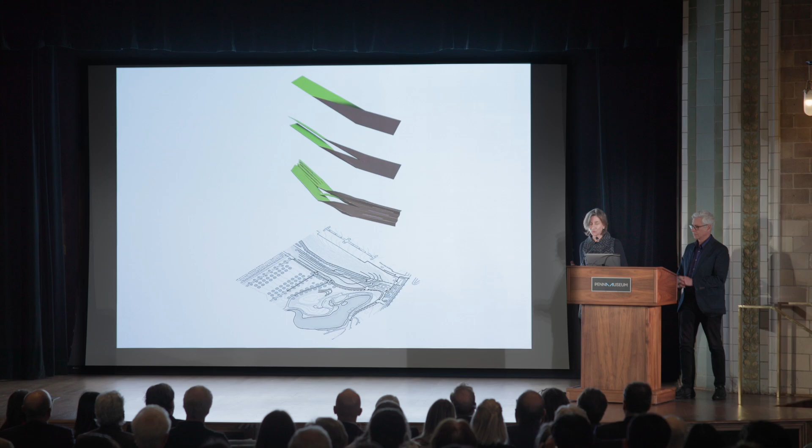So we started to think about what would happen if we could be 100% architectural and urban on one edge, and 100% landscape on the other side. What could you do over 400 linear feet to create a building that was neither purely architectural nor purely landscape, but somewhere in between?

You can literally see this kind of connection with the copper roofs, the historic buildings from 100 years ago, and then moving into the landscape—maybe in this case, a 10,000 square foot roof that adds a new dimension of green to the garden.

The idea of something that is a chameleon, structured architecturally, wandering into a new form, was one where we felt that idea of beckoning in and arriving at the edge of the city would make it almost urban in its context. Sectionally, because it would be embedded into a 25-foot high hillside separating the museum from the garden, we could have something that was a gradient—completely architectural on one end of this trajectory, and completely landscape on the other.

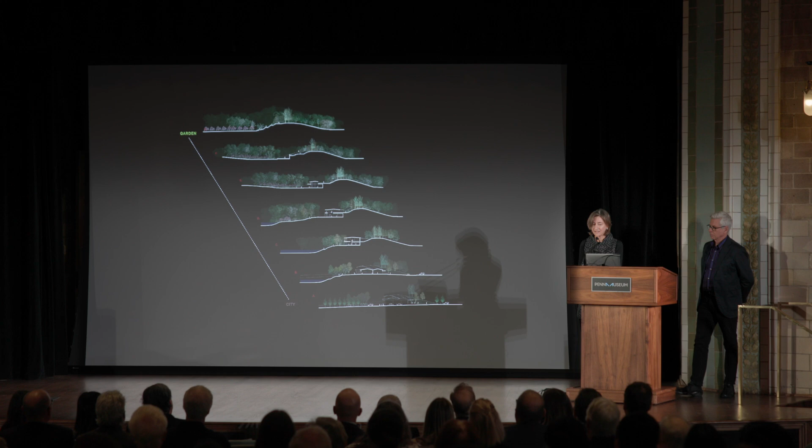And yet that liminal space, in this case neither a full landscape trellis nor really a piece of architecture, is a place where you can slalom through the building with the visitor center on one side. As you start to see this, it's literally a choice between the garden and the passage to the city that you can make.

Now, these curves, in many ways, while they seem natural and organic, did follow the path of the garden—had more work to do. The geometry of that edge of the roof and the ground plane are carefully following the drip line of a very rare flowering green cherry tree.

And it's one where, whether you're inside or outside, there's always that sense, if you're at the visitor center, that the garden is beckoning you outside.

Finally, as we reach the end of this 400-foot linear building, it's a two-sided room that can seat 260. But embedded in the hillside, if you look at the clerestory above, you can start to see that sense of all the levels of the garden coming into focus at this location.

So that room registers itself as an overtly architectural element, a kind of lantern, depending on the time of day. But this issue of environmental responsibility that we all share can be seen here. This is a hardworking building—in a way, it's a machine as well as, we hope, a place of beauty, a place of transition.

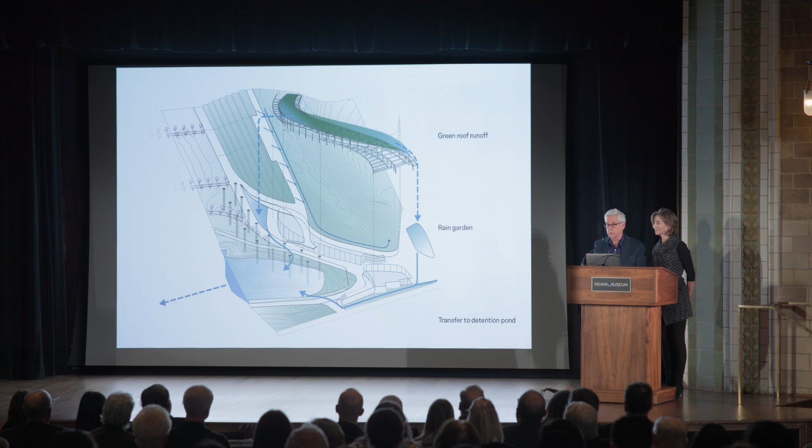But Marion talked about the kind of geometries of the building, and they do follow the beauty of the existing trees planted by the Olmsted brothers, but also take in the extraordinary topography of the building. Here you see, as it reaches into the garden, the building becomes quiet—it almost disappears. At times at night, it's a very subtle glow.

We were fortunate, about 10 years after the building opened, to, in effect, extend the footprint of the building, the agency of the building, into a kind of hillside. This was an opportunity that was important to the garden—a site where the hill was starting to erode, but also a very important way in which they might make this part of the garden fully accessible.

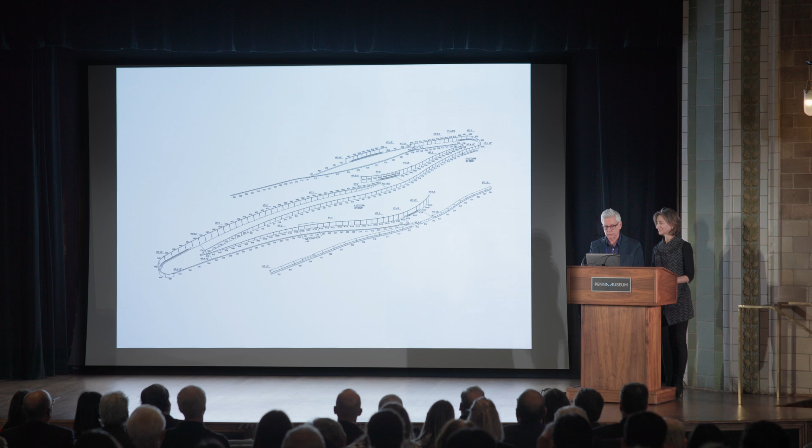But we hope that no one thinks of this as purely a handicapped ramp. It's an opportunity to create another garden, to create another set of views, another way of seeing the garden, extending that reciprocity between building and landscape.

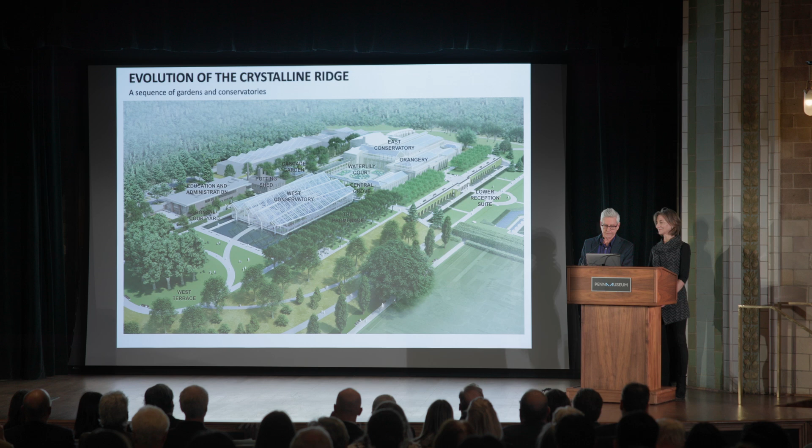We'll focus on only a few of those that are particularly interesting, that speak to the ethos of this project, which is really depicted in this kind of sketch that Marion and I do. We often draw together as a way of communicating. So the formality of Pierre du Pont's original conservatory, in our mind, could start to relax as it moved across the ridgeline with new construction, new buildings, new gardens.

That sense of relaxation could also be seen sectionally. So the conservatory could have a slightly looser, asymmetrical organization—an organization that, for us, its structural ambitions are in many ways a nod, a quotation to the kind of beautiful allée we see here, beautiful allées actually at Longwood, the way in which the inherent beautiful structural logic of nature could teach us. So this is the view of the conservatory.

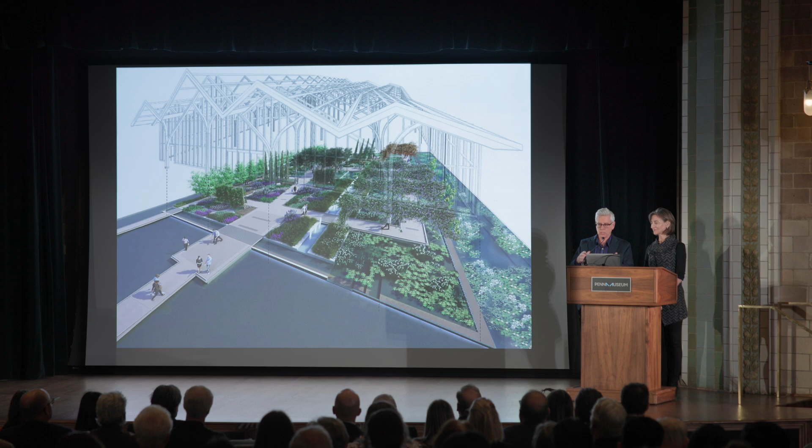It's a little bit about the size of a football field, so it's an extraordinarily large building. How could we start to domesticate it, give it a sense of both tactility but also scale? Working with Reed Hildebrand, extraordinarily talented landscape architects, we thought that the canopy of the conservatory, its placement of columns, could start to enter into a conversation with a series of gardens.

And those gardens, in some cases, travel across water. There's a didactic story, a story about a Mediterranean climate, which is becoming increasingly relevant to our warming climate. It's an opportunity also for playfulness. Longwood's known for its extraordinary floral displays, so the structure becomes an armature for those displays.

As we know from working with Longwood for over a decade, it's grown incrementally over time, and some elements have been ready for rejuvenation. The idea of their conservatory, which is nearly 100 years old, having a companion new conservatory was, in a sense, a humbling bar to rise up to—to think about the fact that Pierre du Pont's level of innovation is one that needs to be brought forward into contemporary terms.

Glass buildings are not noted for their sustainability. So if you think about where the innovation really needs to reside, it's not just in the aerial size that you can see, but it's in the subsurface. Of course, it's geothermal, and there's 1,000 linear feet coming through 10 earth ducts that are bringing the natural temperature of the earth, which is in the mid-50s, enabling it to be very efficient in either raising the temperature a bit or lowering it a bit.

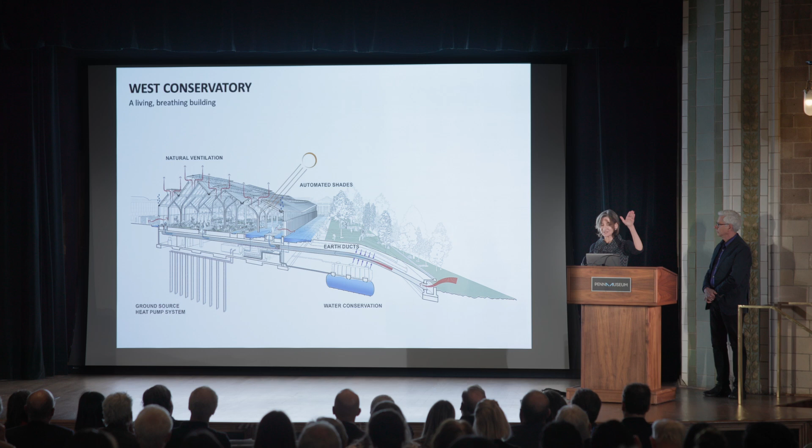And yet, on top of it all, it's a living, breathing building. The walls move like gills on a fish, and the roof moves in ways you might imagine even in a production greenhouse. It's gathering light, in this case the clearest glass possible rather than reflective, because those plants need the light.

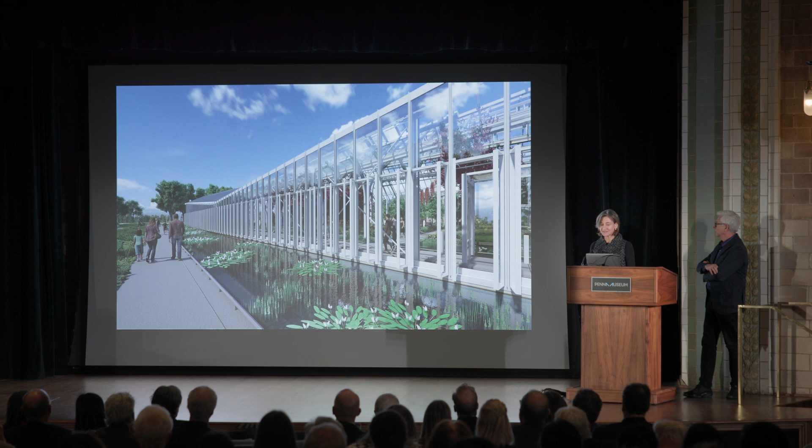This is a 32,000 square foot building, and it dips in a catenary, yet the datum of the operable gills, those operable shutters of glass, follows a water's edge. That living, breathing quality is also on the roof, which is deployed, and all of it is automated to respond to temperatures and create an artificial climate that is perfect year-round for that Mediterranean garden.

As Michael showed in that first slide, on the left, Longwood Reimagined was in preparation of reimagining many parts of it. In this case, the aging greenhouses were quite wonderful, as you can see on the left-hand side of the slide, and yet one very small, very special greenhouse needed to come to life in a new way.

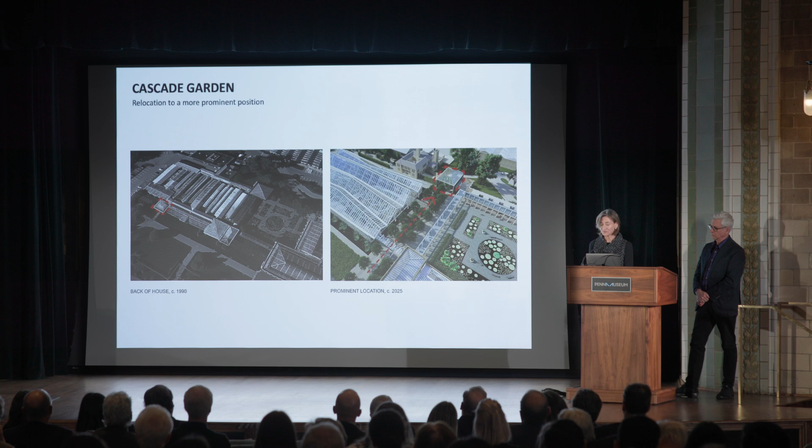Longwood was fortunate to be the proud host and ambassador of the Cascade Garden by Roberto Burle Marx, its only extant garden in all of North America. Taking that slightly hidden location near many of the smaller greenhouses that had passed their useful life, and bringing it center stage on a green grove between the historic conservatory and the contemporary ones, we're able to bring this vision to light.

We were fortunate to create a new glass house for it, with slightly more generous proportions and much better systems, so that garden can thrive again. It's being reconstructed as we speak right now.

As we think about what all of this together is, it's the ensemble of buildings and gardens, first and foremost at Longwood, that is magical. One of them is the Water Lily Court. Sir Peter Shepheard, who has deep connections at Penn as well, authored this beautiful garden, yet it had started to fall into a place of no man's land, particularly with this transformation.

We created a new arcade around it to frame it, give it stature and life, and enable the conservatory to be something you discover through layers of arcades, a grove of trees, and finally peeking out on the horizon is something coming to life as we speak, with huge thanks to Bancroft for the care in all the fabrication of what you're starting to see now.

Some people look at this and wonder about the columns, about the source of inspiration. Michael mentioned you can see the sycamore grove in the distance, and the columns in the current historic Longwood Conservatory are protagonists in that experience. Unlike a lot of contemporary conservatories that span massive vaulted spaces, we loved that intimate relationship between architecture and landscape. These columns reach out much like a tree trunk becoming a branch, transcending column and beam distinctions, drawing light into this relationship between landscape and architecture, and we're very excited.

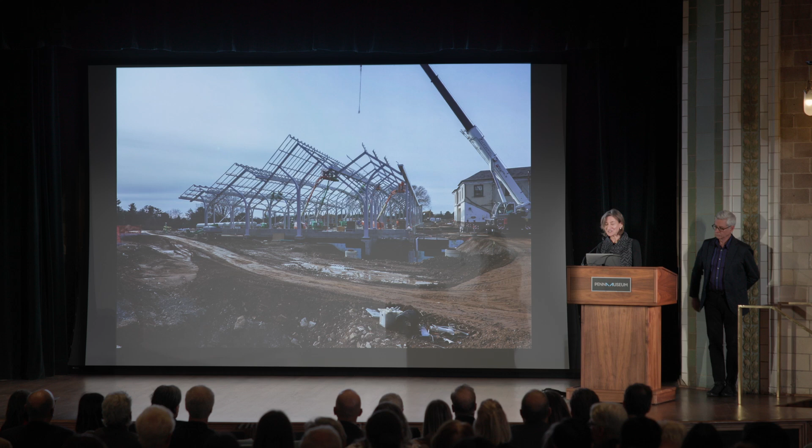This is a cameo here, and we hope all of you come out in November. And Bancroft's on time and on schedule, right?

You can start to see now on that crystalline ridge that Michael mentioned, the dream and ambition of being able to see reflected in the arrival reflecting pool, something that is neither architecture nor garden, neither land nor water, but somehow Longwood reimagined, embodied in something we're looking forward to seeing soon.

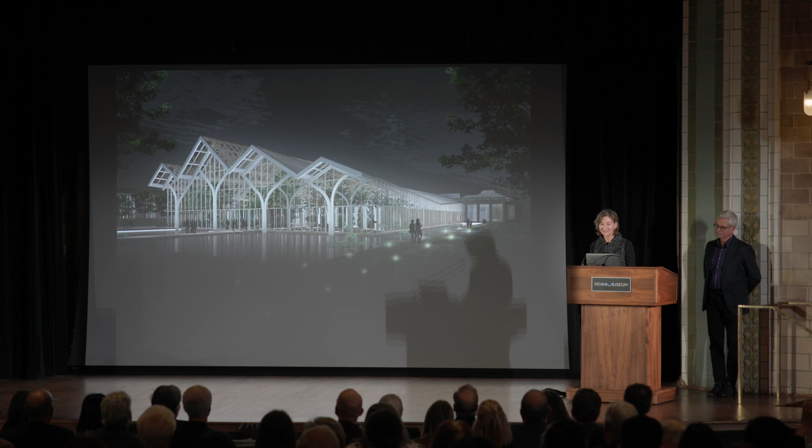On the other side of the equation, social infrastructure is a preoccupation for us. So much of our lives now are caught up in looking too tightly at a little 3-inch by 5-inch screen, and yet architecture has an opportunity to bring all of us together. Particularly on multi-level buildings, there's more work to do with that.

When we think about the social infrastructures that can revolutionize inventions and cross disciplinary boundaries, the Singh Center for Nanotechnology became for us the most extraordinary opportunity to look at urban ideas, campus ideas, and what it means to look at Philadelphia as a place with five remarkable greens, and the university itself, whose identity has emerged around greens.

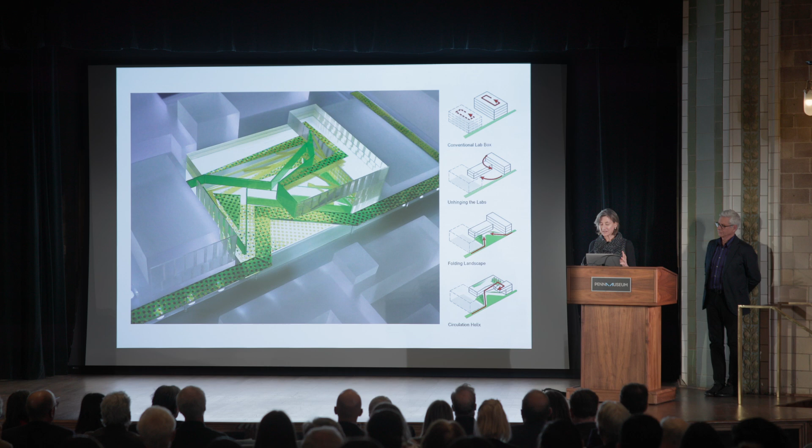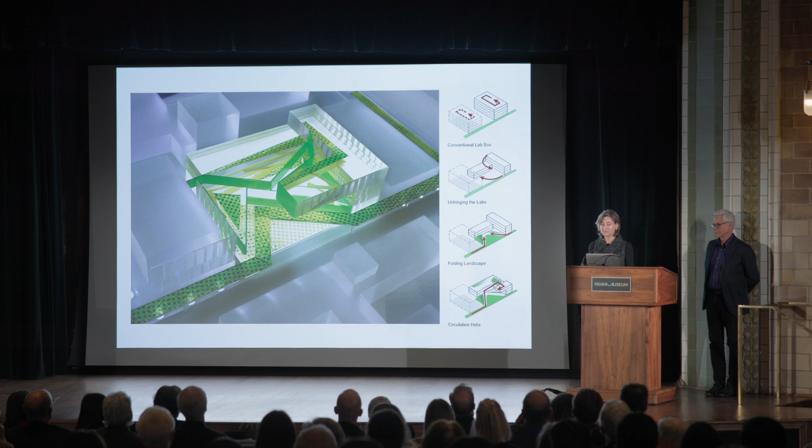And yet the engineering precinct on the campus had less green than one could say is the heart of the campus. So when we interviewed for this project, one of the first things we thought about was how landscape could begin to create a role. Maybe if we were to think about how the building is situated, it could unfold and frame a new landscape, heart to the engineering campus, but also reach out and up and demonstrate in many ways what engineering can do, which is somehow the improbable and impossible.

And indeed, you can see here that while a lot of people think that this cantilever is one of the boldest things, in fact it's the central suspended columns that you see above and the gravity-bound wall that are doing very interesting things in a very tight entry area.

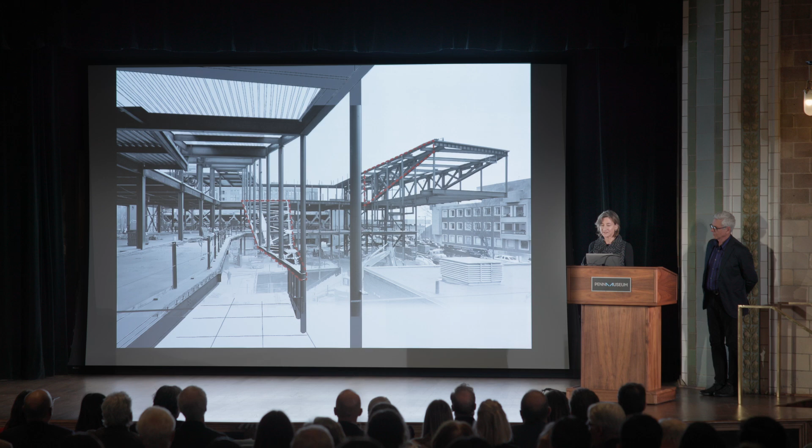And yet all of it comes together to say that nanotechnology, this is the first, in a sense, cross-disciplinary building that was arts and sciences and engineering, is a destination to unfold. And there's mysteries to ask about.

If you see the amber glass on the left-hand side, that's looking into the clean room. We had wondered why you could only have a little amber portal to look into clean rooms, and it was because it was blocking out all the ultraviolet light. So our question was, could we in fact see that science and bring that connection between that magic inside of the clean room to anybody who might come to the building?

And in this case, I think Penn has a lot in common with Design Philadelphia, that they start early with the pipeline to be able to get them onto the other side of that glass wall.

So in this case, the frit on the glass is actually casting shadows that remind you what time of day it is. We need to do a shout out here to our clients at Penn, and also to Eduardo Glandt in particular, who said that because there's 20-foot floor-to-floors here in the lab building, the elevators had to be super far away not to cause vibration, so we had to create the most irresistible stairs possible.

And indeed, each of these stairs has a collaborative opportunity along the way. At any given moment in the building, whether you're on one end or the other, that sense of knowing that there's something going on and that there's activity, seeing and being seen, we think is really at the heart of collaboration.

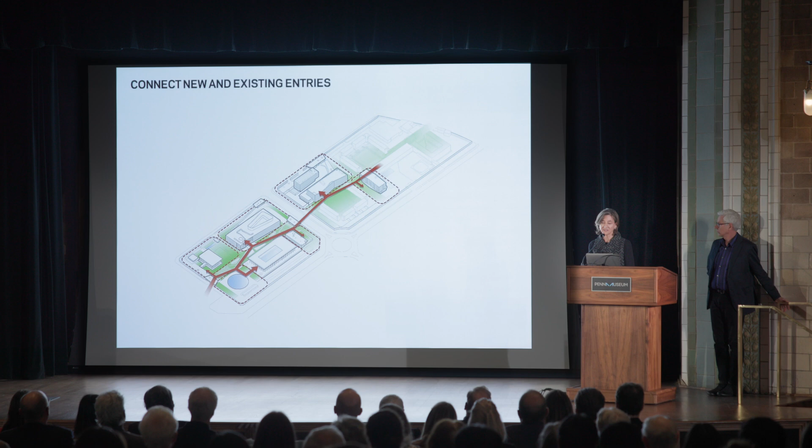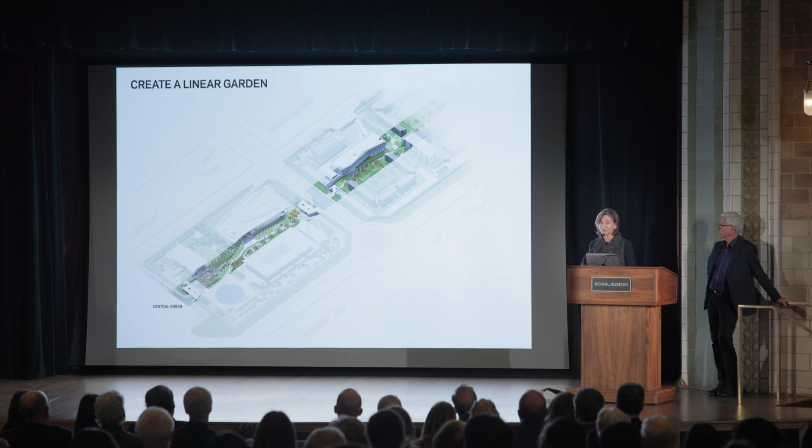So we started to think about connecting them through a journey, through a landscape path that might slalom from one side to the other and connect these experiences together. As we thought about that, it was crafting a new heart to the campus—not about one building at a time, but one building because of another, around a central landscape.

That linear garden, now under construction—we're going in three weeks to meet Ambassador Garcetti and see the fact that there are over 900 people on site today, every single day, building this. It should be realized: Phase 1 in 4 years, still a long run.

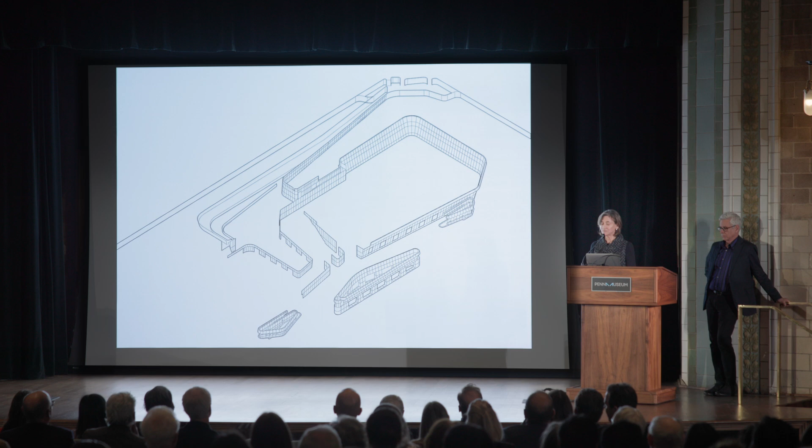And yet, when we think about it, it is being built very intentionally, wall by wall, foundation by foundation. We love the fact that walls have had deep meaning in India, and those layers actually layer public to private. They frame precincts, just as they are doing here—in some cases for security, in some cases for creating a garden arrival for those who are getting passports and visas.

As we think of it all coming together, there's also, from our point of view, an enduring respect we have for the legacy that began there in 1968 and what we are continuing. These two new and old buildings are in dialogue with each other, seen through a new landscape.

So India—Marion touched on the environmental challenges of building there. Interestingly, metrics indicate that in a relatively short period of time, our climate will be very much like the climate of India. This was an opportunity to acknowledge the beauty of the Edward Durell Stone Chancery, seen on the right, and we pushed our building back to recognize its historic importance. But whereas there was a very large reflecting pool that was part of a very different environmental agenda when the chancery was built...

What we've done is kept a very thin layer of water and then built a very significant cistern, so that when there are monsoons we can capture as much water as we can and then slowly use it over the course of the year during the droughts.

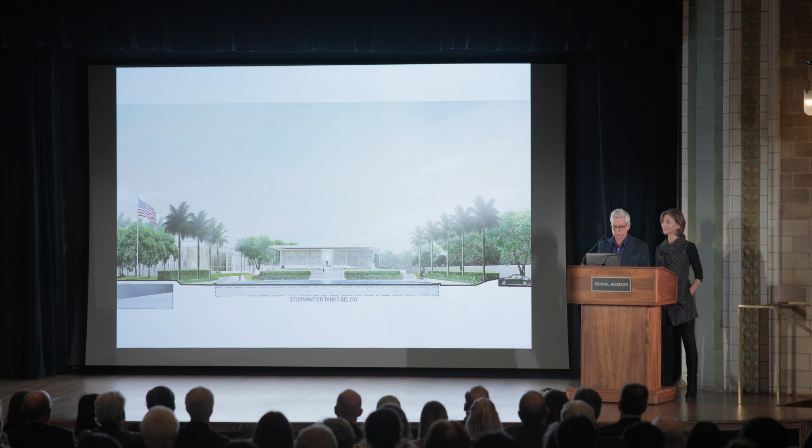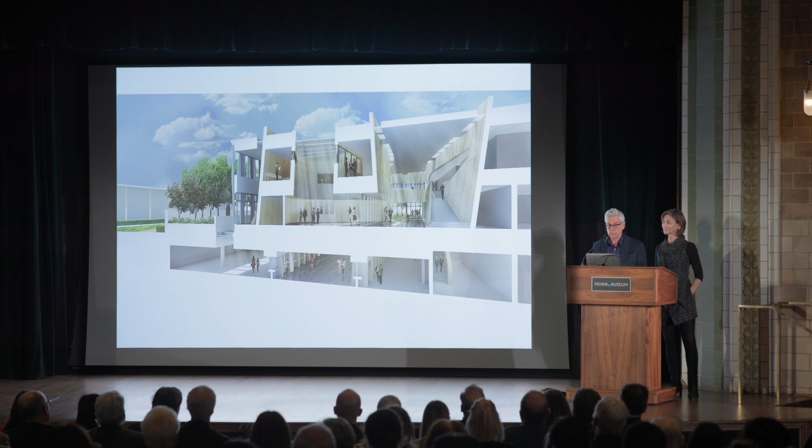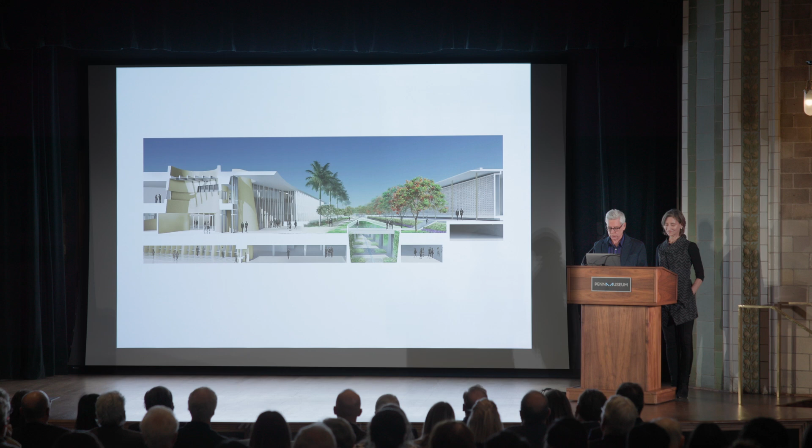The building is rather complex. Embassies are extraordinarily complex, and sectionally, we hope, it's a very interesting building. By pushing a large portion of the building, about 30%, below grade, we can minimize heat gain and keep some areas cooler. Those lower levels get natural light through sunken courtyards, which also let us capture water. But importantly, we kept the height of the building no higher than the original Edward Durell Stone building.

We can also think of opportunities that are actually quite ancient—evaporative cooling, thin sheets of water that cool the entry to the building. In this case, there's a very large, virtually umbrella-like canopy to provide shade. Shade is extraordinarily valuable in India.

That entry then creates a more ceremonial setting with Indian stone, makrana, and there are ways in which, as Marion noted, the walls slowly weave their way around the building and help thermally cool things, where shade now becomes, in a way, the primary driver of the architectural forms.

But also building on the early experimentation of the original Edward Durell Stone chancery, the idea of using this ancient jali screen technology creates a kind of vertical lattice that allows views from inside to outside, but also tempers the very harsh light that is part of Delhi.

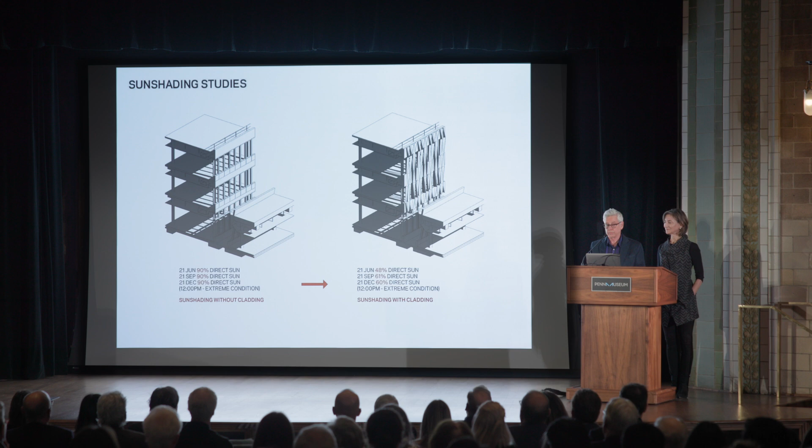So you can start to see how that plays out in our sketch, the building to the right, but also the topography changes to provide natural light to the lower levels of the building. And that plays out along this long garden that Marion talked about—a kind of tapis vert, a green carpet that connects new and old.

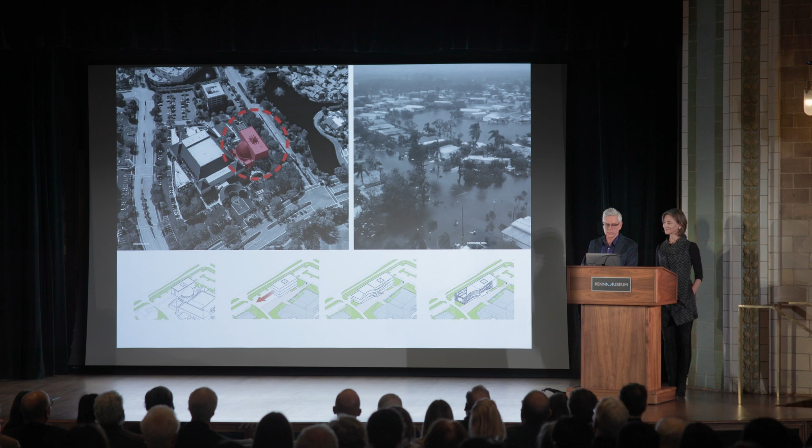This preoccupation we're all facing with environmental challenges registers in this recently completed museum, the Baker Museum in Florida. Florida and India will become increasingly similar in their environmental agendas. This is, in a way, a project born out of Hurricane Ian, which managed to essentially destroy the museum—not so much physically, but there was significant damage, air and water infiltration, so the building had to be significantly renovated.

But it gave us an opportunity to take what was a very hermetic, almost mausoleum-like quality, and open it up to create a much more welcoming Center for Arts and Performance. So you see the new building on the right, with this triumphal arch—I'm being a little generous—and this giant bubble, both of which were heavily damaged.

Sometimes by subtraction, we as architects can create better spaces than we can by addition. So this is, in a way, an essay in strategic subtraction, taking the big bubble, which was also an extraordinary source of heat gain on the inside, and opening up this courtyard so it's much more pleasant and inviting to a much larger community—a setting for all sorts of things.

During COVID, performances occurred outside. Again, the lessons we're all learning from our rather recent past are extraordinarily applicable in creating architectural forms. It's, in a way, out of this moment of crisis that a moment of opportunity emerges.

So shaded courtyards, places in the evening when things are cooler, the ability to circulate not only through an elevator but also through a series of stairs that are often used for performances. Those performances also occur in a series of very carefully calibrated, acoustically tuned rooms.

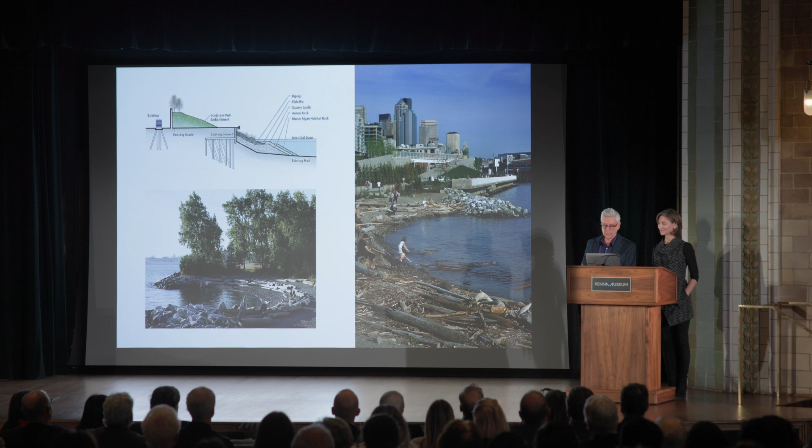That sense of rebuilding the waterfront was one of the things we're most proud of, because it allowed us, through working with not only one juvenile salmon specialist but two, who didn't agree with anyone about what juvenile salmon liked, to create a new beach. We were able to recreate juvenile salmon habitat, which was central to the Northwest and to the peoples who had been living in the Northwest for hundreds of years.

So in a way, we think of this as the sculpture park's hidden garden. It's an opportunity, we now know, having gone back 5, 10, 15 years, that juvenile salmon have returned. There's a sort of agency to architecture and to landscape that is, I think, performative in its environmental capacities. We'll show a little film, again the idea of movement, sound, ambient sound, locating you specifically in a place.

And it does rain in Seattle. Isn't she cute? I mean, we couldn't have planned it.

And we love the trains, again, the sound and the movement become sculptures in and of themselves. So this is a project very much in its infancy, and again goes back to this issue of how to build, how to create public settings that are hybrid, neither architecture nor landscape, but both.

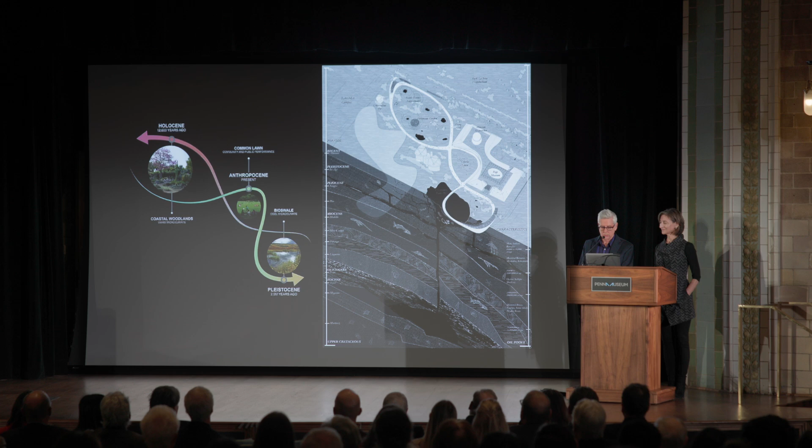And Los Angeles, as you know, is going through an incredible climate change. But we love the sense of history and mapping that history as part of the research we love to do on projects, seeing if in that history the surface and subsurface could become protagonists, which of course they do, particularly as the oil and tar seeps up.

So we created a kind of, decided to save part of the Page Museum, which you see with a kind of space frame, and expand it into a new addition.

It's part of Los Angeles' cultural history, and then we developed a kind of triple loop that would connect the areas of excavation with the interior of the museum, effectively turning the museum inside out.

So at times you can wander across the site. It is a public park. At times you cross the bridge over the tar pit and you can actually smell the methane and really understand the geologic forces in a very haptic way. And you can also see excavation occur in real time, bringing that science quite literally to the surface.

As Michael mentioned, this is the largest paleontological active excavation site in the world in an urban area, and it is busy 362 days a year. That's very interesting when you think about this being a place of science, a public park, and also not very far from Hollywood.

So we started to think about this kind of mystery of what is coming out of the ground, what the old Page Museum was—which frames a public green that belongs to everyone—and what a new expansion that could host the collection could be. What we realized is there's a tremendous inability to get a window or lens into this, because the original Page Museum was simply an earthwork with a space frame over it.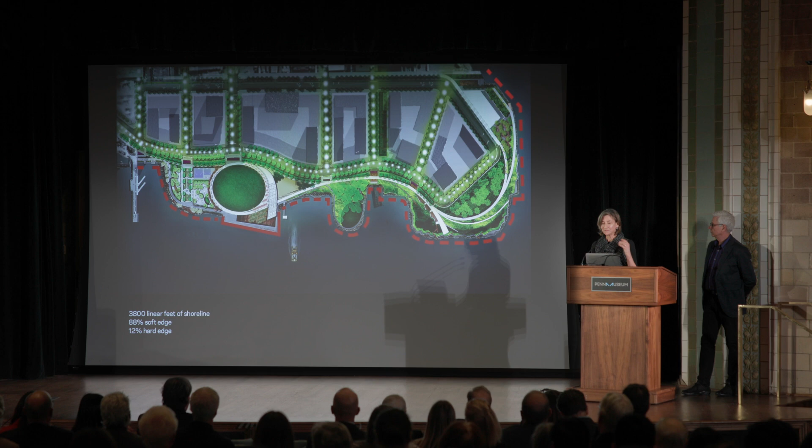Now it's very interesting to think about this strange remnant site, where we found a lot of virtue in the kind of movement and topography you'd see later on the right-hand side—active recreation on one end and discovery on the other. And yet at all times, think about preparing to allow the water in rather than raising the walls higher to keep it out. At that central green, the idea is that you could actually catch and release water with care, releasing it out as it comes to flood.

This playing field, used by the school across the street and by the community at all times, is one where you can bring into focus so many things: community, recreation, and the incredible prospect to the city beyond. So it really is kind of a charm bracelet, where there's rain gardens, playgrounds, etc.

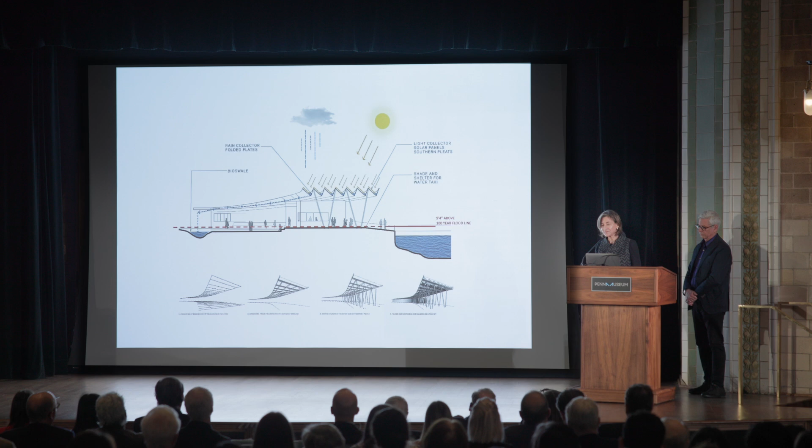This playing field and the pavilion in the distance do some interesting work that may be less apparent to the eye. We talked about storm surge and water collection, but the pavilion itself is powering the park. Look at this folded, pleated metal plate roof—perforated, as we learned, for the very necessary need to keep uplift from lifting the building off the ground. It has solar collection on the south side, collects water for irrigation through the channels, and provides necessary shade for people coming in on the ferry to reach the park.

For us, the part that gives us great joy is that it's really hosting and welcoming a community that gets to enjoy this park now as their own, as part of that water's edge. There was a slightly illicit beach called Water Taxi Beach behind the chain-link fence, and we thought we'd make a more family-friendly version of it on the other side of the pavilion, which you can see here.

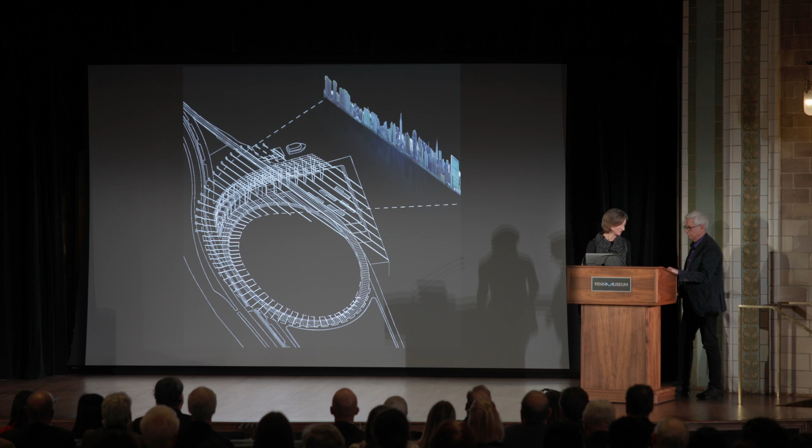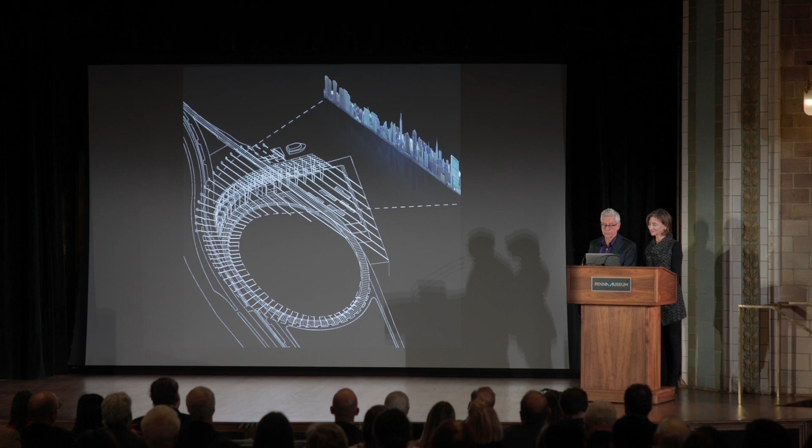By the way, this giant oval, parts of which are astroturf, conceals a very significant cistern, which was crucial during Hurricane Sandy—we captured the water and released it slowly. The Parks Department, who were very skeptical before Hurricane Sandy, started to appreciate what we and many others had been advocating: a much softer approach to dealing with water management.

After completing the first phase, there was a new mayor, so we had to interview for the project again. This is New York, of course.

But what was an incredible opportunity was to work on the southern edge where there was some topography. On the East River, there's very little topography. You can start to see how we wanted to take advantage of that topography to create a kind of giant belvedere that would get you out over the water, so there was some sense of looking up and down rather than just across. That heroic move was a way for us to give measure to some of the natural topographies that were part of this site.

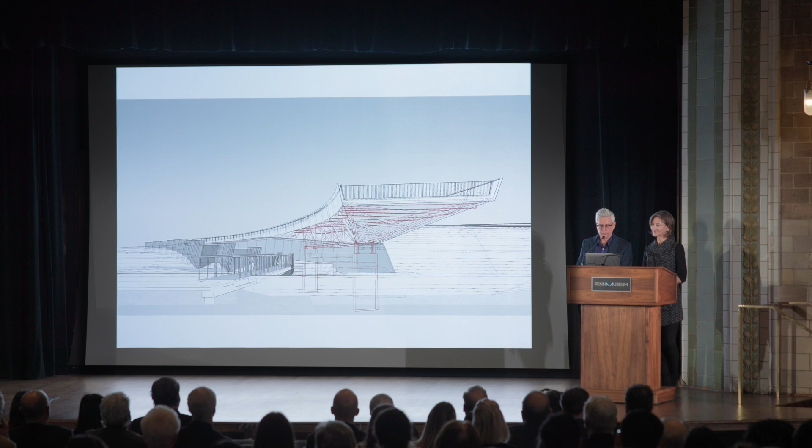It becomes a kind of extraordinary architectural and engineering opportunity. Working with brilliant engineers like Arup, it allowed us to develop this 40-foot cantilever, which was fabricated in Maine at a shipbuilding company, then taken down the East River, hoisted, and positioned so you could get an elevated view.

So it's also a very sectional project. Marion touched on the idea of reclaiming, like a giant linear sponge, the kind of wetlands that had been here in pre-colonial time—using their natural ability to mediate extreme flows of water. So we were able to recreate a wetland. You see it here in its infancy, and it's particularly beautiful as it changes over the seasons—at times these gum trees become brilliant. This is, in a way, a peninsula that at high tide becomes an island.

So again, trying to use architecture and landscape to heighten the natural perceptions of the world in which we are lucky enough to inhabit. And this becomes an opportunity for selfies, so it's become extraordinarily popular as a wedding destination. Who would have guessed? And in a way, this is our last project.

It talks about what we hope are the emerging reciprocities between architecture and landscape as a productive way of dealing with serious and very pressing environmental issues. So this is the last film, again capturing the kind of environmental quality. You can see kids playing soccer. That was in the fall. That's not me, by the way.